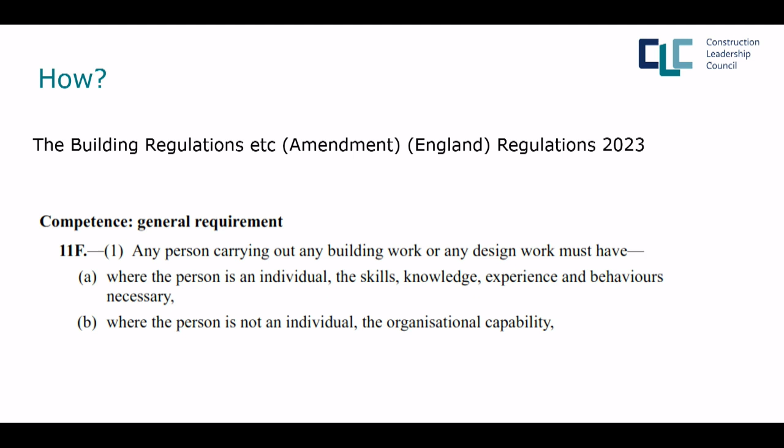The building safety regulator has said that is our regulatory body for competence, and competence is now enshrined in law. So if you say, why are we doing this? We have to do it, it's a legal requirement. And it says that competence for an individual is having skills, knowledge, experience, and behaviours - I'm going to say SKEB over and over again. Skills, knowledge, experience, and behaviours. This is what competence is defined as.

Why we're doing this is on a higher risk building, all those working in or around a higher risk building will now be audited on their competence by the building safety regulator. This is a new thing, it's going to come in next year. The building safety regulator has also said that they're going to use our competence frameworks as the baseline for auditing competence, so the work we are doing will help improve competence in our industry across the board. And on all other projects, the building control body will be auditing competence.

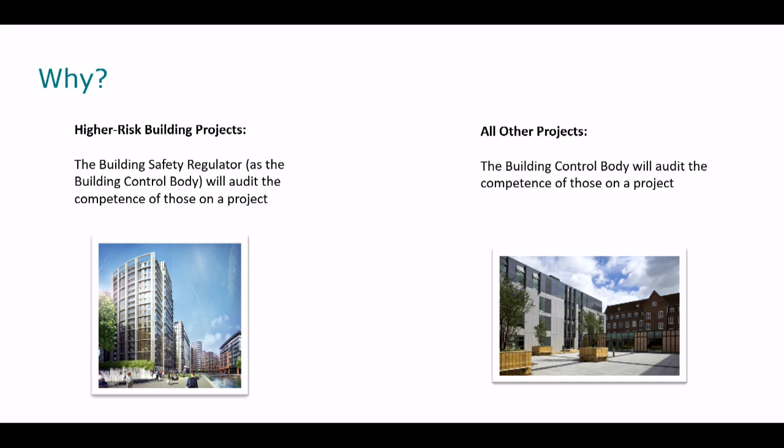I'm going to go through these slides quite quickly. I've got 15 minutes, but I'll give you the slide pack so you can just have it. If you have some questions, hopefully we'll have some time at the end, but I'll be quick.

So when we talk about competence, I like talking about competence equilibrium, because in those countries that have weak competence standards and enforcement, what we found is low innovation, underinvestment in training and quality, and really a price-led business. In those countries where we have strong competence and standard enforcement, they benefit from value-led businesses, better than normal innovation, and really consolidation of the employment standards.

For consultancy roles in the UK, we're okay, but for trades, it's pretty much all over the place. Have you seen the web of blame that was shown at the Grenfell final inquiry? It's pretty horrific, but I took inspiration from it and created an installer competence skills map, and it's chaos. When I joined, I'd never really worked in skills before, and this is what I saw - it was really confusing. I didn't know where to start, who to speak to. They all connected in different ways, and what I've tried to do is clear that confusion.

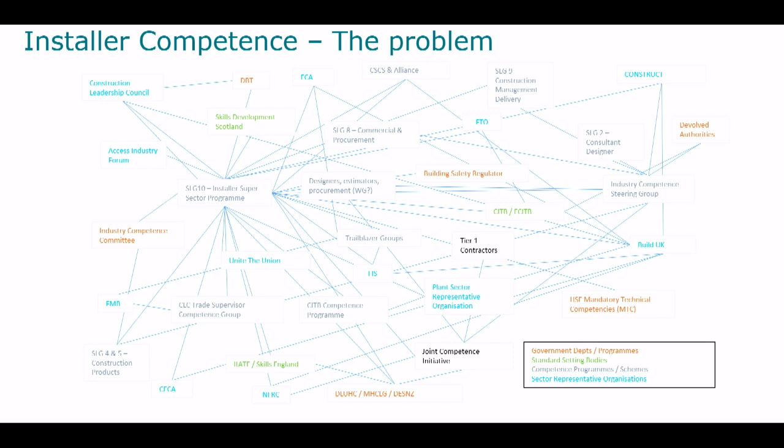So I've got a brick wall analogy. It's very basic, and I'm sorry, but it's how I work. The idea is that if this is the brick wall on the side of your house, today our brick wall on the side of our competence house is structurally unsound. And the reason why is we all focus on the solutions.

So if I said to you, what is competence for you? Some people might say it's my vocational qualification, my apprenticeship, my CSCS card, my whatever. But actually that's not what we're trying to do here, because people who sometimes set the standards for a vocational qualification may be completely different to the people who are setting the standards for an apprenticeship, and they're completely different to the people managing the card schemes.

And then you've got training providers running their own training, completely disconnected. What we're trying to do is dig down to that first layer of rotten brick and set the skills, knowledge, experience, and behaviours for the whole of our industry.

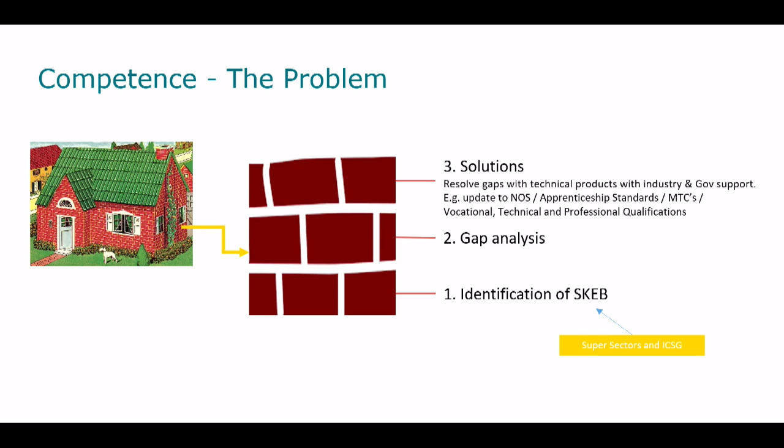And that will then feed through the skills system, so that no matter which route you take, whether it's an apprenticeship or a degree, you come out the other side with the same competence. Does that make sense? I hope so. Some of you are nodding, some of you are looking at me blankly.

But the Industry Competence Steering Group has just launched, and I wanted to show you this because not all of you are installers, some of you are engineers, some of you are program managers, project managers, and I wanted you to see this because there's about 1,000 people in the Industry Competence Steering Group today working on creating competence frameworks for all these roles. It's supported by the Building Safety Regulator.

So this work has been going on for about, it must be longer than that, about 5-6 years, but we're really ramping up now in installers. This is how it works today.

So we have the Building Safety Regulator set up. We have a committee that focuses on competence for our industry, and we sit under super sectors. Sector-led Group 10 is working on installer competence.

One of the other things we've done is try to align with all these competence programs. Like I said, fix that first layer of brick. So these are all the programs we work with, and the Construction Leadership Council supports this work.

So I'm going to show you very quickly our installer competence program so you can get a bit of an understanding of what we're trying to do.

We consider an installer competence framework to be made up of these documents: a strategy explaining why we're doing this, a skills, knowledge, experience, behaviour statement on a page - let's make it simple for these people, please - a route to competence, showing how we're entering industry and how we plan on gaining competence, and then an implementation plan on how we're going to implement that in the skills system.

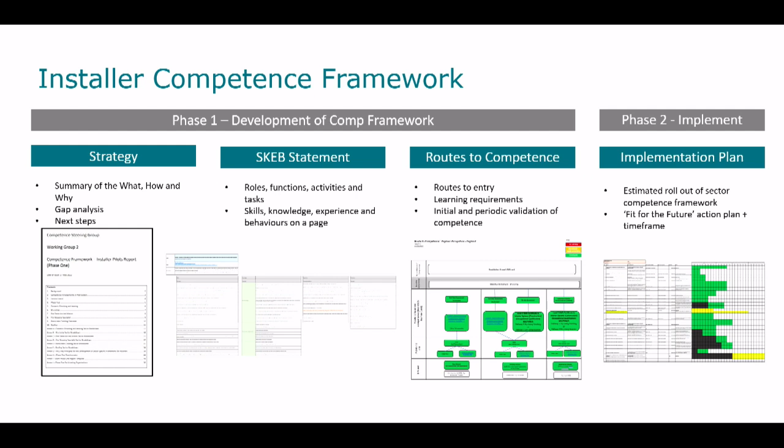This is our program here, and we've broken it down into 5 super sectors. As I said, there's 130 different sector groups, so about 600 people working on this at the moment. I'm going to run through it really quickly, but this is Envelope, and it's led by Neville Grunwald of Waits.

Everyone in green, we've created our competence framework, and we're working on implementing it at the moment. Everything in orange, we're working on creating those 4 documents. And everything in white, we are trying to set up and run. It can take a really long time to do just one, let alone 130.

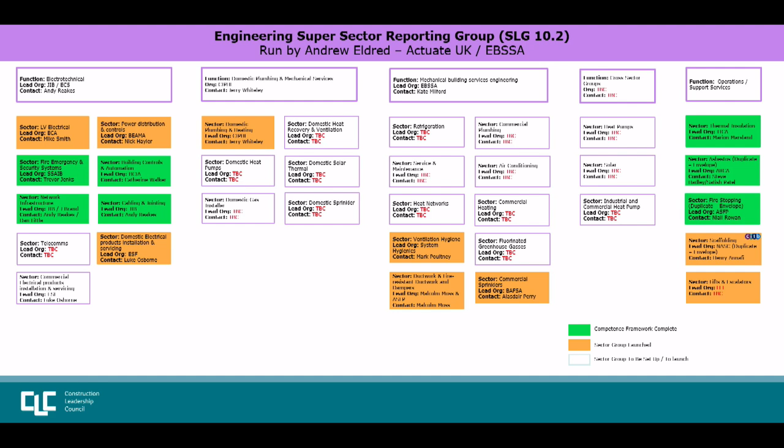Here's engineering services. We've got interiors. We've got civils, which is where tunnel skills sits, and it's again led by Alasdair Reisner of CECA. And then we've got construct, a lot of tie-in with the civils work as well, so there's a lot of kind of cross-pollination there.

So I'm going to give you an example, because I know I've just thrown a lot of information at you, but what we did on rain screen cladding. So rain screen is the stuff that burnt at Grenfell, right? And when I started on this, the rain screen standard was tied up in a roofing standard. So you had to be a roofer to install rain screen cladding. And it was factually incorrect. So the people who were trained to install rain screen cladding were trained in the wrong stuff.

It was so bad. So we got involved and we set out the gap analysis, which was saying where are the problems, like I've just told you. We set up a working group. We drafted what skills, knowledge, experience, behaviours look like for rain screen cladders. And now we are implementing it.

So we've updated the standards, we've unlocked funding, we're upskilling the whole industry, all the experienced workers at the moment, so that they can be competent in installing rain screen cladding. We've worked with CSCS on industry accreditation cards to tackle that issue, so that experienced workers can continue to work in industry today. We're also working with MHCLG on the cladding remediation program.

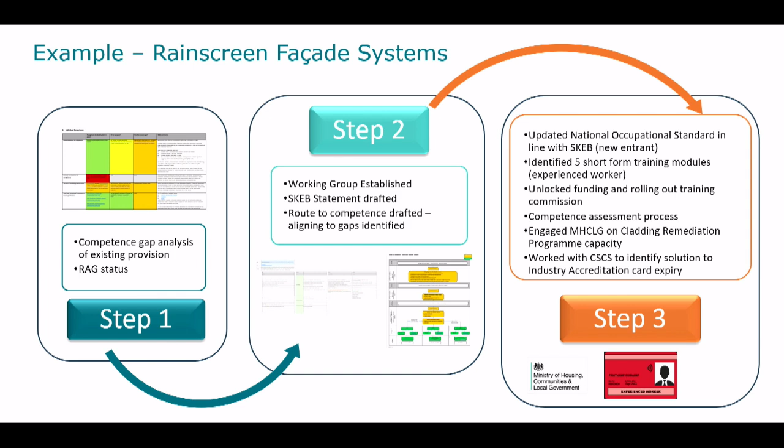So we're doing all of this just for rain screen cladding, but we plan on doing the same with all the sector groups. My last slide is about the CLC webpage.

All of this is on that page, but you can also have the presentation material, I think, Sam, is that right? Yeah. So that's all I wanted to talk to you about.

I would love for you to ask me anything you want. That's a lot of info, but go for it.

Any thoughts? Any questions? Just one for me then. So what's the key takeaway for people here? What do you want from the people attending here to support the scheme?

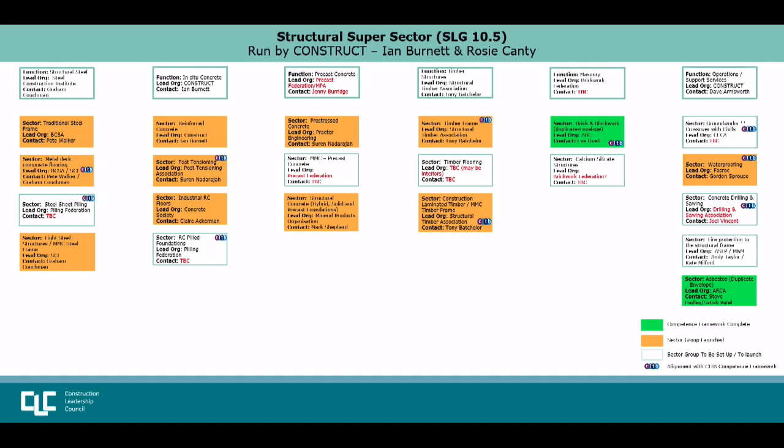We would love for you to get involved in the sector group with Tunnel Skills. We would love for some representation from all of you. It's a lot of work, as you can see, and we need your support in this. And we need some of these white boxes filled. So if you have contacts, people you want to get involved, or you yourself want to get involved, we desperately need you involved. So get involved.

And also talk about us when we're not in the room. You now know about this information. We'd love for you to talk about it, understand it, and yeah, get involved.

From a tunnel skills point of view, we're looking for help to do this, this is something that we're trying to do. So the tunnel skills group is the conduit then into this. If people want to get involved, or you've got someone in your organisation you think might be interested in doing this on the side of their day job, because we're all doing it on the side of our day job, we need more people to come along now. Because at the moment, it's just us. So that's part of the reason for this.

It's an appeal for assistance. Does that make sense? Does anybody want to get involved? Do you want to lift your hand now? I'd love it. No one's lifting their hand. Ian, but probably Ian would be a good point of contact. Most people know Ian, so. Yeah, we'd love for you to get involved.

I want to make a comment rather than... Oh, you don't want to get involved? Oh, okay, I was called, wasn't I?

Yeah, this is a huge project you've got, right? And the complexity is mind-boggling, and you're just thinking, of course, of high-rise buildings and fire cladding systems. Of course, that's a model then for something that ripples through the industry. Right, so it's huge.

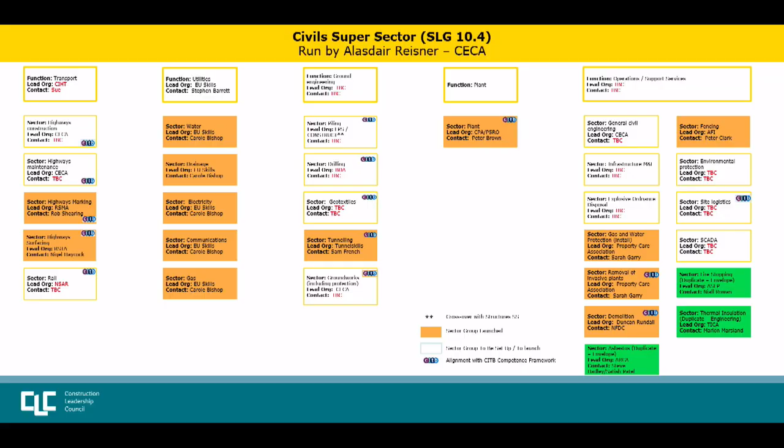That brings us on to our evening presentation, which is on the use of ground freezing for cross-passage construction on HS2. So we have three speakers.

Hammad, tunnel agent from STRABAG. She brings diverse experience from working within a specialised tunnelling consultancy to self-delivery and client positions, and has contributed to noteworthy projects including Crossrail. Experience in a wide range of tunnelling techniques ranging from sprayed concrete to tunnel boring machine assembly launch to traditional tunnelling by hand. She now serves as tunnel agent, leading the construction of 20 cross passages and 4 shaft to tunnel connections. Ala champions the promotion of best practice, co-authored a technical paper on innovative tunnel design and construction, and actively mentors peers to foster industry growth. Her contributions to the BTS and UN Women UK reflect her commitment to inclusivity and diversity in tunnelling. Recognised for her technical expertise, innovation and leadership, Ala continues to drive improvements in the tunnelling industry.

Following Ala will be Phil Allvey, Tunnel Engineering Manager for STRABAG UK. He's been in this position since 2020 and has held the position of Tunnel Engineering Manager for the HS2 2 project, overseeing 2 TBM tunnels and cross-passage construction. Prior to this role, he served as an engineering lead on the London Bank Station upgrade project, which involved the integration of SCL and squarework tunnels with operational underground tunnels. Phil achieved charter status through his design and geotechnical contributions to projects such as London Power Tunnels 2, Thames Tideway, and other significant UK-based initiatives.

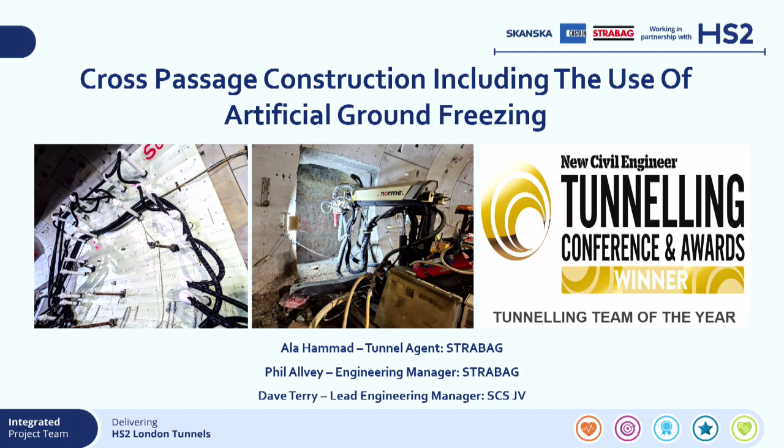Right, so I've really got the easy bit tonight. I'm going to hand over to Phil and Ella, but I'm going to talk about an introduction to the project, and the start of the evolution of the cross passages and the corresponding risk management. This includes the initial evaluation of the ground conditions and how these were incorporated into the ECI phase, or as HS2 calls it, the stage 1 phase of the works. I'm also going to talk very briefly about the structure of the team.

HS2 Area South works: all the London tunnels have been undertaken by the JV of Skanska, Costain and STRABAG. We're supported by our design house, which is a JV of Arup, TYPSA and STRABAG. For the cross-passage works, we've also engaged RDMI for the ground freezing and WJ for groundwater. I'll apologise in advance, there are numerous suppliers who we could have named, but I've only got another 35 minutes, so if I haven't mentioned you, apologies. Our works comprise everything from the southern end of the Colne Valley Viaduct through to the station approach at Euston. We passed through Old Oak Common Station, contract S4, which has been delivered by Balfour Beatty VINCI.

40 kilometres of twin-bore tunnels, an upline and a downline tunnel, approximately 1 kilometre of large diameter SCL, 7 ventilation intervention shafts, a diaphragm wall crossover box, various embankments, bridges, etc. However, the bit we want to focus on is Northolt Tunnels West.

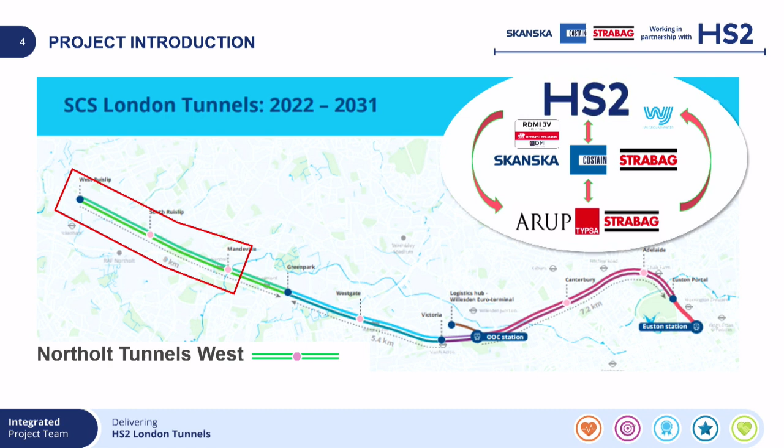Very, very simply put, the cross passage is constructed using a sprayed concrete primary lining, sheet waterproof membrane, and a cast in situ secondary lining. I'm not going to say any more about delivery of the works because I don't want to steal Ala's thunder.

So a bit about the geotechnical context. That shows a typical cross-section through the cross passage and a traditional borehole stick. You can see the orange there is...

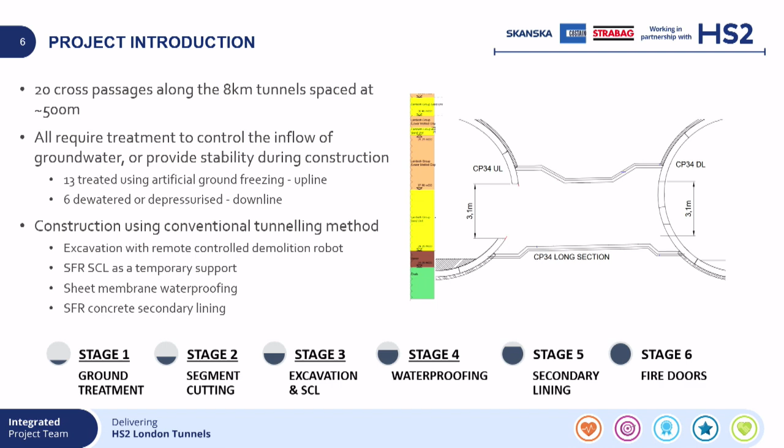So in terms of geotechnical hazards, the Thames group is fairly benign, the Lambeth group is notoriously variable, and the Seaford chalk brings abrasive conditions and high water pressures.

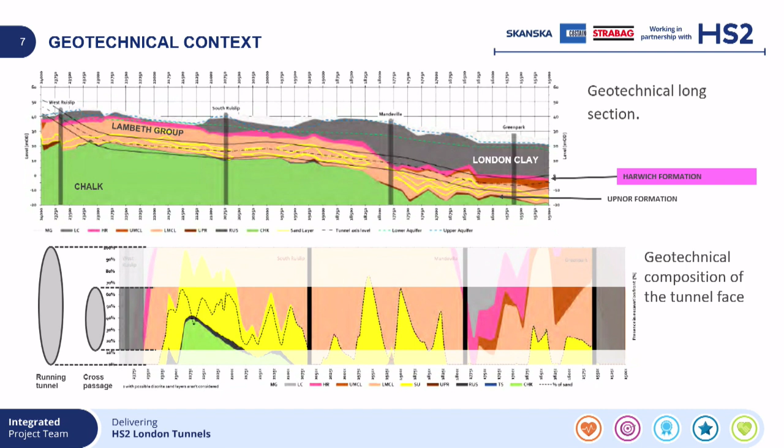So a bit about pre-contract planning, how all this started. This is like a trail of risk management, if you like. It started off at the pre-contract or stage 1 phase.

The principle behind stage 1 was to provide a cost for the scheme and also to develop our construction methods. So using our initial GI, we identified significant sand channels, we identified the presence of the Upnor formation, and we identified some of the hazards within the chalk.

So to communicate these conditions and to start establishing a budget for the works, we categorised the cross passages. So these range from...

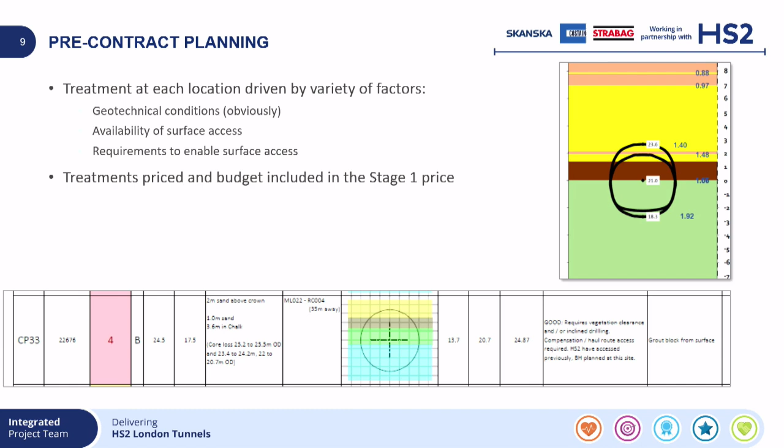Category 1, which was the cross passages fully in clay. Category 2, where it's in the Lambeth group but not influenced by the lower aquifer. Category 3, in the Lambeth group, influenced by the aquifer. And Category 4, which was actually within the lower aquifer.

What this enabled us to do was to start building up this picture, if you like, where we could start defining the treatments necessary and start putting a budget to them.

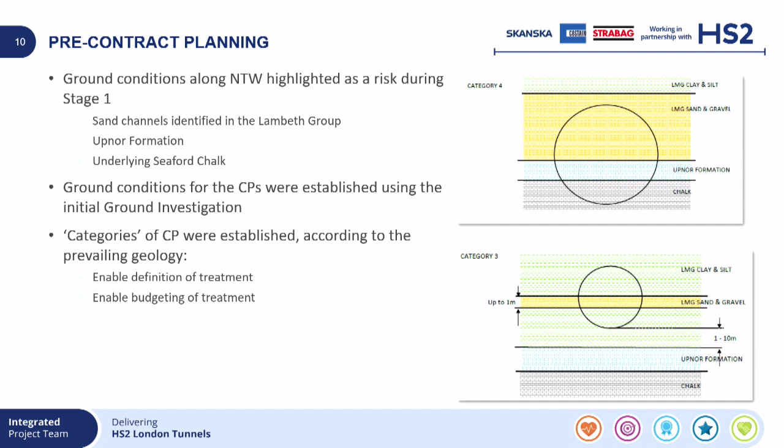Obviously the treatment assigned to the various cross passages were a function of the ground conditions, fairly obviously, but also the availability of the surface access and any work that needed doing to enable the access, bearing in mind that most of our alignment is under an operational railway corridor.

This information was scheduled out and then was included in our stage 1 price. So again, we're building up this picture of the cross passages to end up in a price.

Concurrently with this geotechnical risk assessment, we also had to position the cross passages along the route. The graphic at the bottom shows an extract from the High-Speed 2 technical standard spatial requirements, which governs the spacing of the cross passages in relation to ventilation shafts and each other.

This identified several gaps in the ground investigation where further site investigation was needed or would prove beneficial to ascertain the prevailing ground conditions at each location.

This was done in 2020. We used sonic borehole techniques to try and maximise the core recovery in the granular soils, and this supplemented the work we did in 2017 and the further site investigation we did in 2018/19.

Phil's going to talk a bit more about the verification of the ground conditions in situ, so I'm not going to say much more about this.

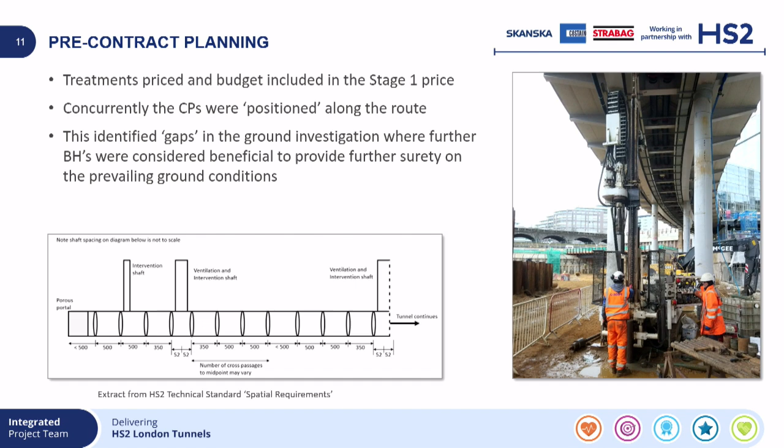I would like to say something about the team structure though. Fairly conventionally, NTW, as are the other engineering teams on the project, is set up with a delivery and an engineering team. We thought long and hard about how to best represent delivery versus engineering - that's the best we could come up with, so you can judge for yourselves who is who.

It's a fairly conventional approach, really. The engineering teams are a function of the overall SCS technical function, which is set up to be independent from delivery.

So we adapted this very slightly to increase the engineering ties with a QA team, as opposed to having a completely separate QA function and a completely separate technical assurance function. We tried to integrate this a bit to fulfill the role of the HS2 lead designer, the duties of which are listed on the slide.

The important one from the construction of the cross passages that we've taken forward into the actual delivery of the works is the one we've highlighted at the bottom, which is assuring that any changes due to ground conditions are incorporated into the design.

On that note, I will hand over to Phil, who's going to talk a lot more about the design and the engineering.

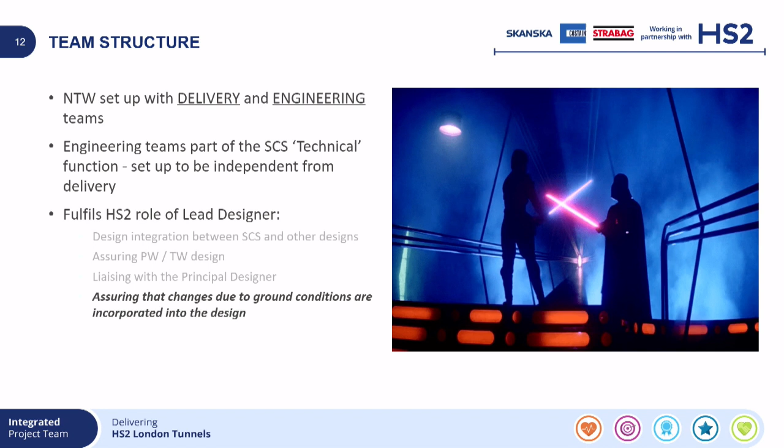Thank you, Dave. So yes, I'm going to go on to talk a bit more about the design and then a bit more about the engineering afterwards.

Starting off then, we knew we had a lot of sand, so we needed to look at the best methods to stabilise the soil. We really had three options here: permeation grouting, ground freezing, or jet grouting.

Jet grouting we could pretty much rule out straight away because we didn't have surface access - we're in central London. We then had the permeation grouting.

However, we're a bit concerned about the efficacy of this method because the soils consist of very fine silty sands, so the ability of the grout to actually penetrate through these soils could be limited. And actually on other projects, it was shown to have limited effectiveness in these sort of conditions.

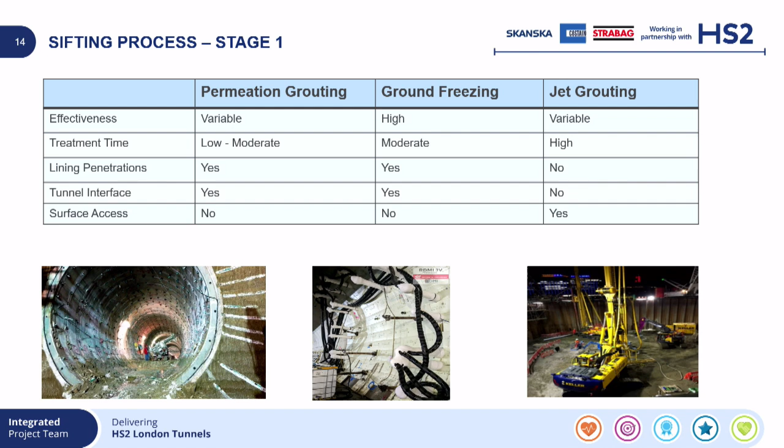So that meant that freezing was progressed as our chosen option. Freezing is typically seen as a last resort due to cost, however Ella will present later in the delivery slides why this was comparable to the other methods.

So the chosen method we had to work with the segments around the cross passage. We had the innovative special segments which we used, and this consists of tension rods both above and below the opening, embedded within the segment.

You can see how these perform under loading in some of the slides here. This replaces the traditional temporary works frame, so it's a very sleek solution, as can be seen in the right-hand picture - you wouldn't even know that it is there. So it saves a lot in terms of tunnel space.

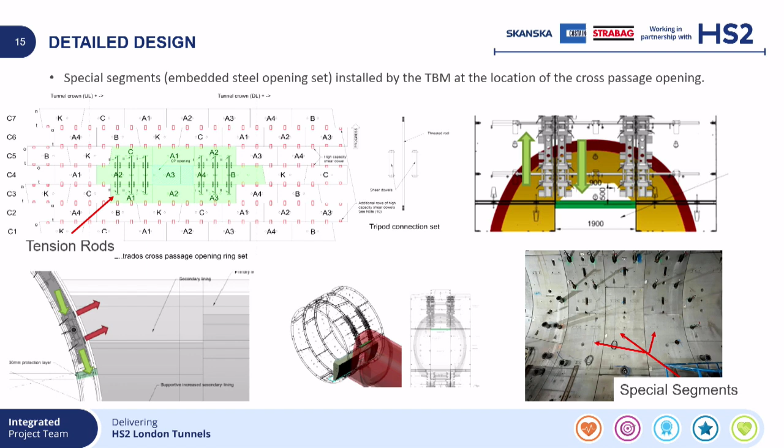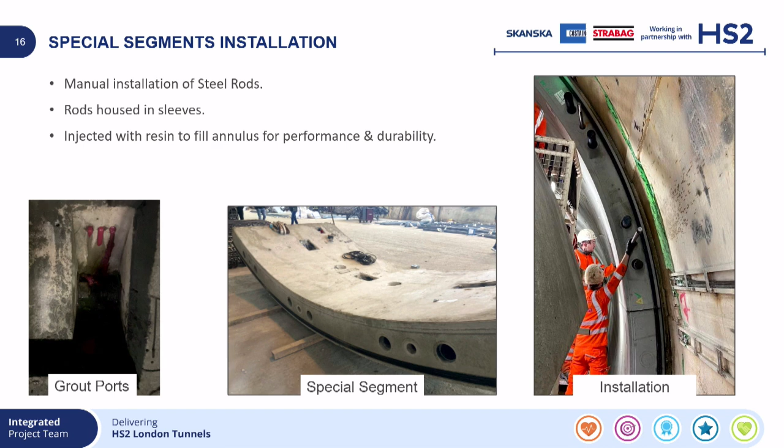So a bit more about the detailed design. As part of the detailed design, we needed to verify the properties of the frozen soil. This was done in the laboratory rather than undergo impractical and expensive in situ testing. Parameters such as the compressive strength and also the frost heave pressure were looked at, and they were fed back into the FE model to confirm that the ground freezing would actually work.

So the ethos of the design was that anything above axis level needed to be frozen, needed to be supported. And this was supported with a 2-meter thick freeze wall, which had an average temperature of -10 degrees.

The innovation also was to incorporate sacrificial drill zones into the special segments, which I've shown. Through this, we could insert the 30 freeze pipes or so that were needed to form this ice body. These were typically installed at 1 to 2 meter spacings, and they could extend up to 18 meters in length. The brine is then circulated through these freeze pipes at approximately -32 degrees, and this is a closed system, so there's no impact to the soils directly.

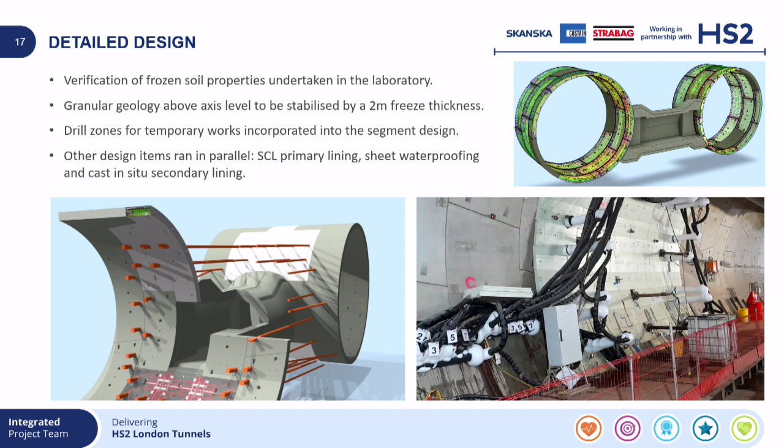Okay, so I now want to go on to talk a little bit about the engineering and how we involve the other teams as well. This involves design management, data review, and I then want to go on to talk about the rest - really 3 aspects of the engineering team.

So the first one then is design management. Freeze pipe design must consider the TBM ring roll, which can move plus or minus 100 mil, and also the horizontal and vertical deviation of the tunnels, which can move by 150 mil. So they will never be in their design position.

We also need to remodel the center line of the cross passage because of this horizontal or vertical deviation. This needs to be updated and put into the Amberg model, which is used as part of the SCL profile control.

Additionally to this, there are thermal calculations that are performed for every specific cross passage because each cross passage, as you've seen, has unique soil properties. So this will change the freeze time. Following this, we also need a Cat 3 check to confirm that the freeze pipe layout will successfully result in a closed freeze ring.

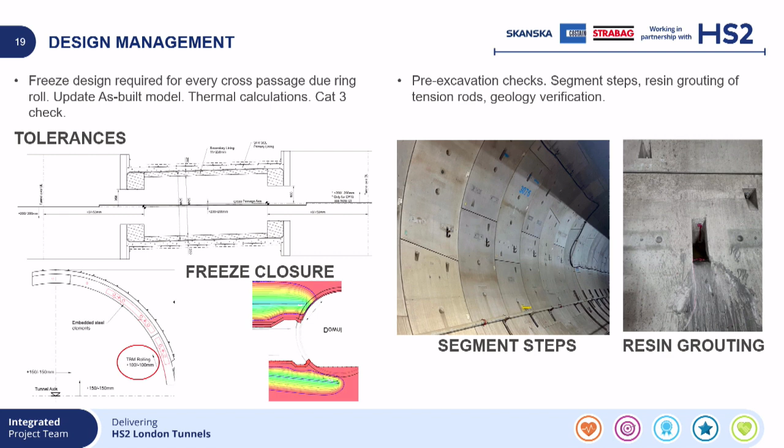And then also a key stage is the geological verification. So I want to spend a little bit of time on this because this is quite important for the process. As the TBM passes the cross passage, which you can see in the diagram in the top there, you can see that one of the TBMs has already gone past, with the other TBM about to go past as well. As soon as the TBM goes past, we'll take a spoil sample from the belt, and then we'll do a PSD test from this to confirm the granularity.

If the granularity differs significantly from the design, we'll then accelerate the probing process with our subcontractors. By probing, I mean we'll do hand probing through the grout sockets using a preventer in a typical probing array that you can see there. This is really to confirm the stratigraphy.

So in some cases, we actually found that there was more sand and it varied from the design model. We had to switch from dewatering to ground freezing. By doing this early, there was no program impact, because you have to remember that it can take some 40 days or so to actually form the ice body. So this was key to prevent any program delays.

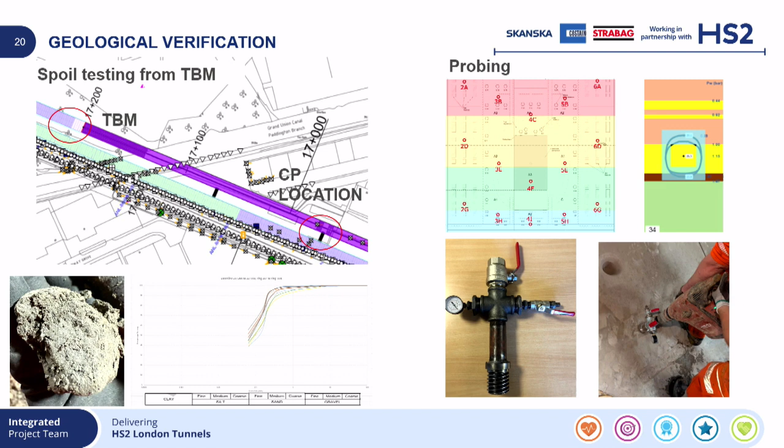Okay, and then I want to look at the second item that the engineering team and the other subcontractors look at, and that is the data review. Starting it off with the verification of the soil temperature around the cross passage. So there's 3 to 4 temperature pipes around the cross passage, and each of these temperature pipes has sensors every 0.5 to 1 meter along it.

The target average temperature is minus 10 degrees. There are also temperature sensors installed in the lining, on both the upline and downline tunnel, and this has to reach a minimum target temperature of minus 2 degrees. Additionally, a drainage pipe with a gauge is installed in the middle of the cross passage, which is critical to identify freeze body closing, because as the pressure builds up, it identifies that the ice is forming around the cross passage, and this pressure can then be released by opening a valve. This is critical to confirm full closure, so we can open up the cross passage to begin excavation works.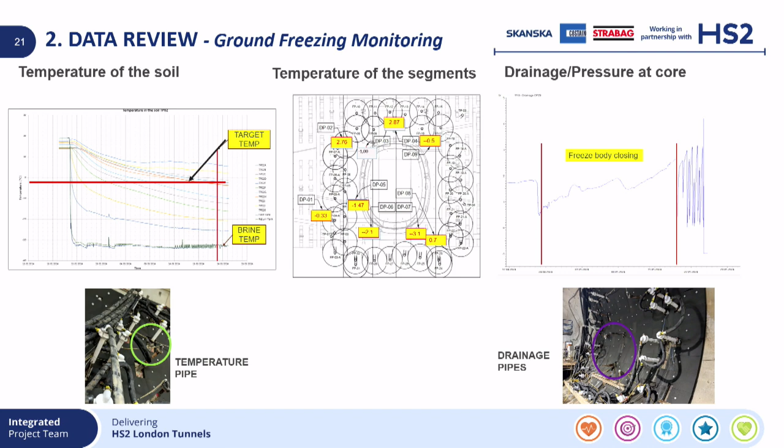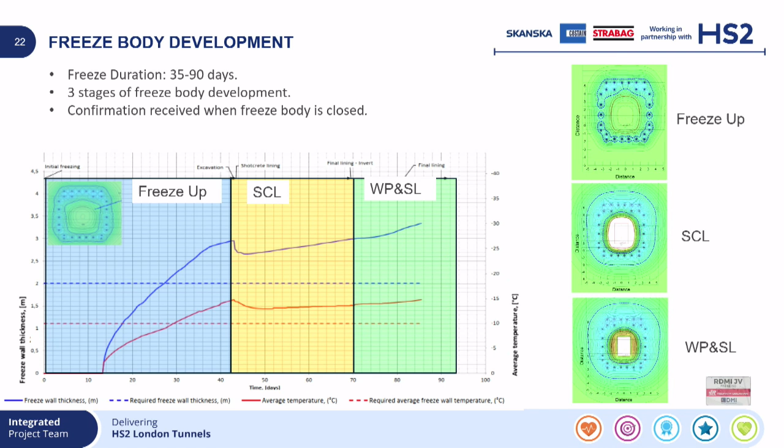Another key aspect of the data we review is the monitoring data. Before we start any works, we need both surface and in-tunnel monitoring within the cross passage. For in-tunnel monitoring, we have 5 arrays installed on the heavy and special segments, and as the ice body expands, we have convergence moving towards the inside of the tunnel. An FE model here shows one of the deflection profiles.

From the graph below, you can see that as the ice forms, the convergence moves, with the 2 chords adjacent to the cross passage opening showing the most movement. Different geologies will produce different frost heave expansions. For example, with more cohesive soils, we typically get more convergence.

Then as we begin excavation and SCL works, you can see that this heats up the ice body and the convergence rapidly drops off, so the segments start to move back to their original position. One thing to note is that if we have too much excessive movement, we will hold what's called a management action team meeting, which happens when we have a trigger breach. If we had, for example, an amber or red trigger, we might take mitigation steps, such as cutting the segments early to release some of the stress.

Finally, when we switch off the freeze, as shown by the green dotted line, the convergence returns back to its normal level, and the ovalization of the tunnel starts to return to what it was originally. For surface monitoring, on the right-hand side, we have transects set up above the cross passages, and you can see again that as the ice body forms, we have heave on the surface. During cross-passage excavation, this heave stabilizes, and then finally, when the ground freezing is switched off, it starts to return back to its normal value.

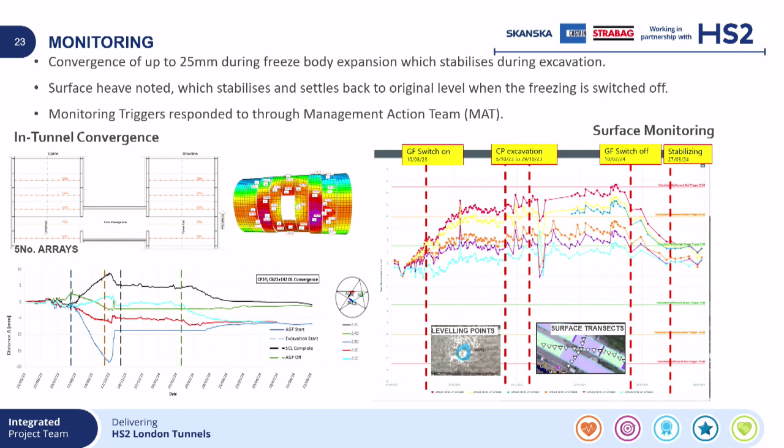Okay, so that's covered some of the data review that we look at. The third item as part of the engineering function is to consider the required excavation and support sheet, the RESS. The RESS ensures compliance with design and allows modification of the sequence to varying conditions, and it's signed by both the engineering and the delivery team. We have hold points in the RESS, which dictate critical items that must be followed before we move on to the next excavation stage. Rather than talk to you about what a RESS is, I want to show you a couple of examples of how we use the RESS to change sequence.

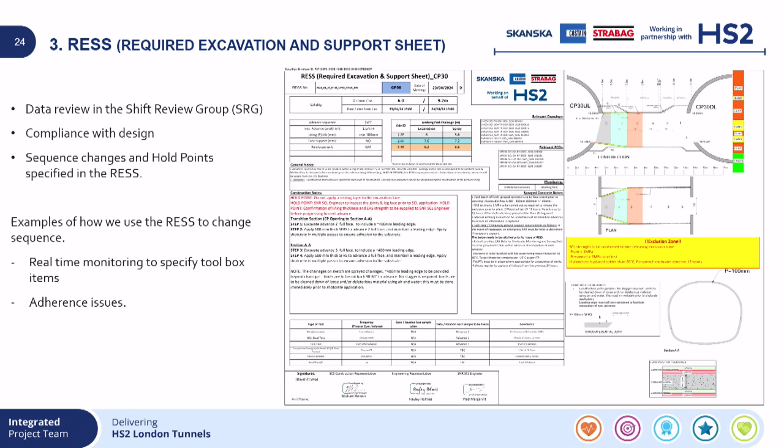The first example will be the use of real-time monitoring to adjust sequence, and the second will be when we have adherence issues or a geological challenge. On the first one, I want to show how we use monitoring to change the sequence. The design prescribed either an excavation split face or a temporary invert when we were at the collar sections or excavating near the tunnels, and this was to prevent excessive deformation.

So we wanted to change from this prescribed method to make this a toolbox item. So we needed to prove to the designer that deflections could be kept below predictions and below trigger levels. And to do this, we used the innovative Wisen system.

This is wireless tilt meters, which are installed on the cross passage in the arrays. So you have 5 arrays, like we've seen previously, and you have tilt meters installed in the middle of the segment. And you get the rotation around the joint, which as a vector by trigonometry is converted to a displacement movement.

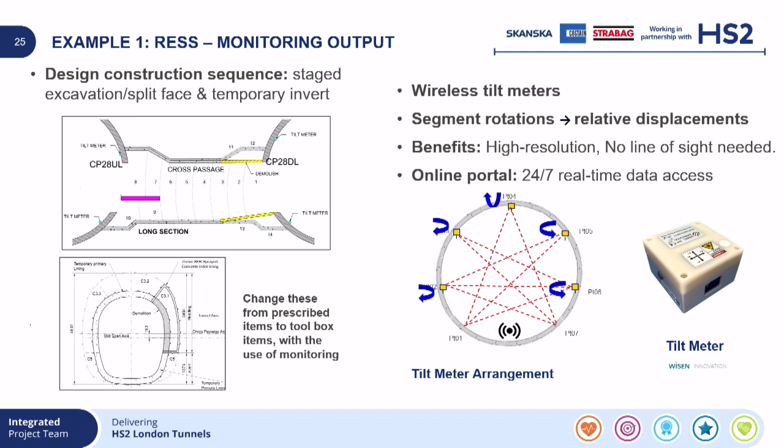The real advantage of this is that it's high resolution and there's no line of sight needed. So we could install this below the platforms, or if ventilation bagging was in the way, it wasn't an issue here. And it provides us with almost real-time data.

So the question is, how did we use this to define our excavation sequence? And we did this by defining a toolbox trigger. This was set to half the green triggers, with the green to red set on ovalization. Toolbox trigger was set at 16 millimeters.

This slide is just to show you how we react to a trigger breach and a non-trigger breach. So on the left-hand side, you can see that all the chords have remained below the 16 millimeter toolbox trigger, so we could continue as normal with the top heading and invert excavation. However, on the right-hand side, you can see that one of the chords has gone above the toolbox trigger.

So this would mean we would need to implement one of our toolbox items here to prevent further excessive convergence, such as the temporary invert, which would involve more breaking out, of course, or we might have to split the heading as well.

So the question is, how did we manage this as well? And it comes back to the RESS. We have a hold point in the RESS that states you cannot move on to the next excavation advance until you have checked and confirmed that the toolbox trigger has not been breached.

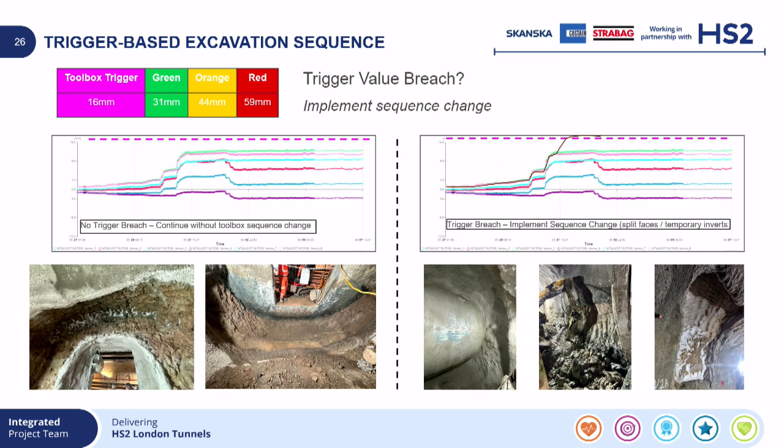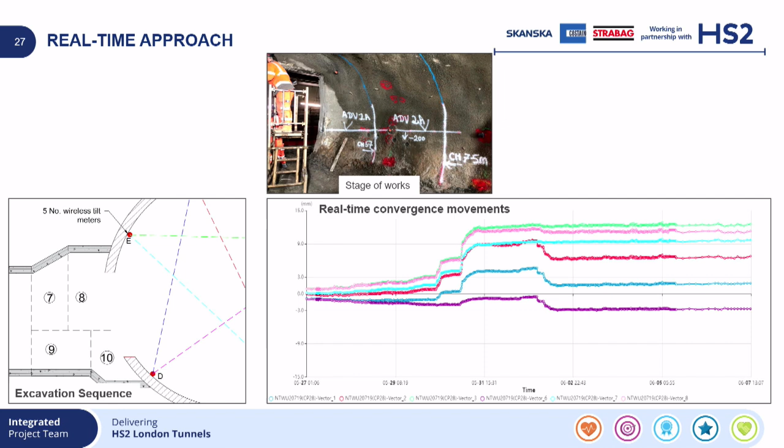The slides I'm going to show you indicate a real-time sequence of how we would react as the advances progress. So you'll see the picture in the top-hand corner there, and then the excavation sequence and the output of the Wisen system, which shows deformation against time in the bottom right there. This will be a better indication of how the deformation we get on each advance.

Okay, so let's start with advance 7 then, as we would do real time. The picture at the top there shows the advance, and then on the left it shows where we are in the sequence, and then we have the output of the Wisen system. You can see at this stage we have very low movements, only 3 mil corresponding to this advance. So this would mean we have not breached a hold point, and we can move on to the next advanced stage, which would be advance 8.

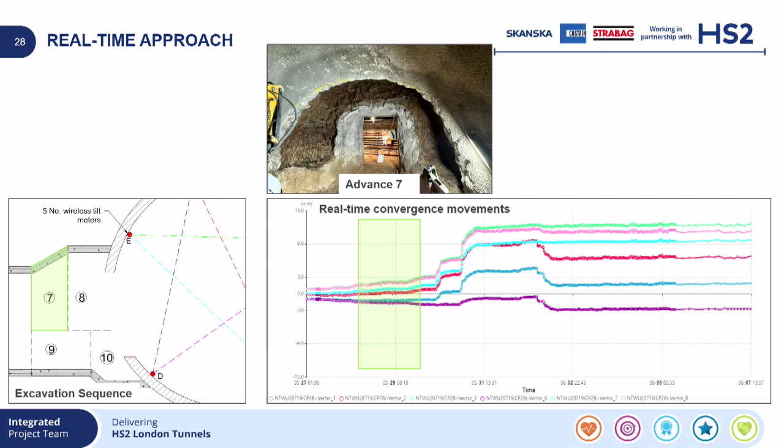So we continue with our live process here, and this is our excavation directly behind the tunnel segments, the top heading. This is where we correspond to the most movement, but again, we have not breached the toolbox trigger of 16 millimeters. So we can continue as normal without splitting the face.

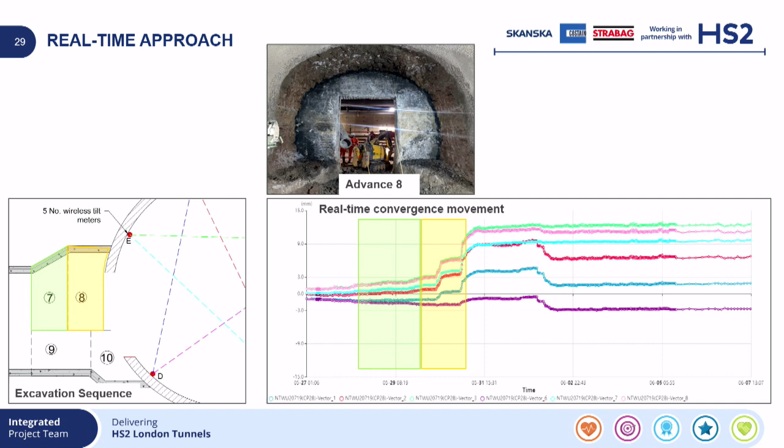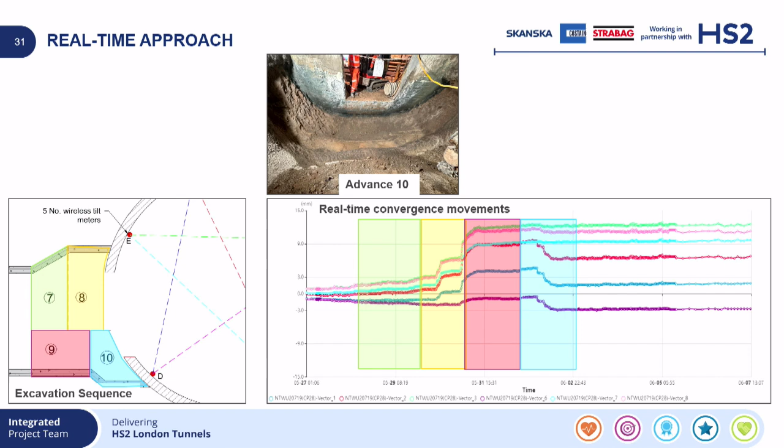And we would then carry on to our 2 inverts, which would be advance 9, and then finally advance 10, which is next to the tunnel segments. So we can see that during the 2 inverts, the deflection is relatively low. So once you have the top heading in, this acts to stabilize the segments. Hopefully this has shown you how we use the RESS and this automatic system to define our advanced sequences.

So the next example I want to show you is how we might change the RESS to ground conditions. This example is in the first cross passage where we had SCL adherence issues. This is different from fallout — it's not a fallout of the ground. It's simply the SCL bonding to the sand and not being able to stick to it, essentially.

So the mechanism for this was that the partially frozen sand was not strong enough to support the SCL, it would warm up, and that would mean the SCL would fall off as it was applied. So going forward, we needed to do two things to prevent this happening: reduce the initial mass of SCL being applied, and also reduce the exposure time of the sand to keep it stiffer and frozen for longer.

So we did this by implementing changes, one of which was using a P1 and P2 layer. That was to reduce the weight of SCL going onto the crown. So we'd initially apply a thinner layer of perhaps 50 mil, and then carry on with other works and top this up afterwards to full profile.

We could also do other things to prevent the exposure of the sand, such as a top heading and an invert, reducing the advance length, or doing a face subdivision. All of these items would prevent the sand warming up, and keep it stiffer, which would mean it would hold the SCL.

Other things that were done at the same time were using rapid acting accelerators and batching the SCL at higher temperatures.

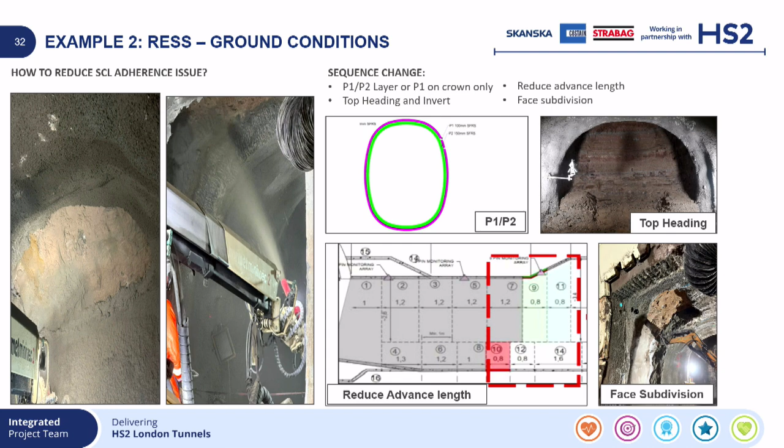Following this, we also wanted to make further optimizations. We were in a fully frozen cross passage, so we wanted to work with the designers here, and we've successfully changed the lining thickness from 250 mil to 100 mil. You can see the difference in thickness on the left-hand side. This had the obvious benefit that less mass was being applied to the crown, so you could hold the SCL better. It's also a massive saving in terms of SCL and a considerable carbon saving.

Once the SCL adherence issue was mitigated, we also wanted to look at other optimizations. Where we didn't have sand in the crown, we looked to increase the advance length, because we're in a fully frozen ice body.

Through the face logs and through the RESS, we could adjust the sequence. You see the full array of the cross-passage pictures there. But when we had clay in the crown, such as cross-passage 29, we could increase the advance lengths up to 2 meters, as was permissible by the design.

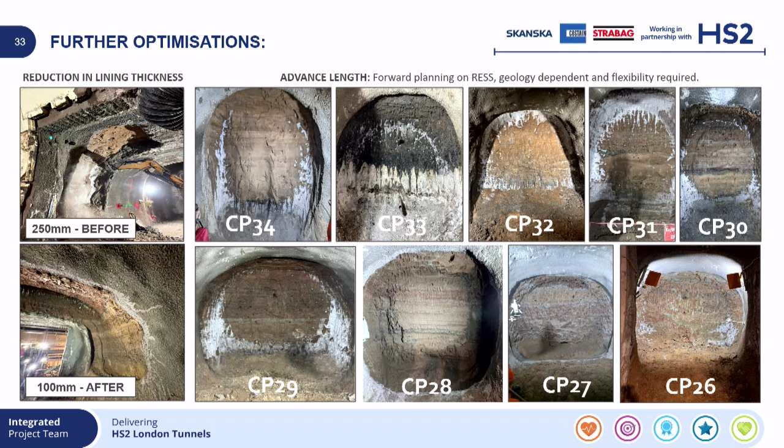This had the advantage of reducing cycle times, increasing productivity, and reducing the amount of SCL wastage as well. So hopefully that gives you an overview of the RESS and some of the engineering functions along with the other subcontractors. I'm now going to pass you over to Ella, who will talk us through the delivery and construction.

Thank you. I'm going to kickstart the delivery section with pre-construction. So the cross-passage life cycle begins when the ground treatment starts, followed by excavation and SCL works, waterproofing, secondary lining, permanent sealing works, cross-passage walkways and door frames.

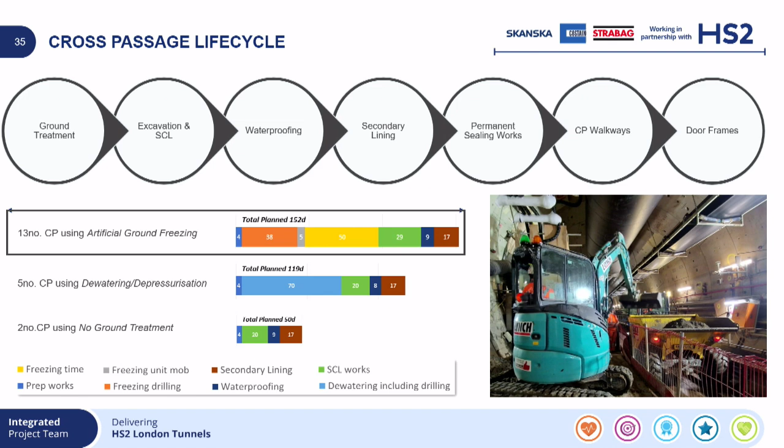The cross-passage life cycle duration varies depending on the ground treatment we choose. If we choose artificial ground freezing, the duration up until secondary lining completion is 152 days. If we choose dewatering depressurisation, that's reduced to 119 days. And if there's no ground treatment, that's 50 days.

In terms of risk management, the initial temporary works design concept for the groundwater mitigation incorporated a hybrid solution. This involved 2 subcontractors working alongside each other, and it risked delays in terms of both time and cost. For us, we need to try and mitigate this interface or completely eliminate it. So we looked at a couple of different processes, and I'm going to cover 2 for now.

The first being lean application. So we applied regression analysis, which is a study of the time activity relationship, and we looked at the hybrid solution first of all. The hybrid solution was a combination of artificial ground freezing in the crown and dewatering or depressurisation in the invert. This solution was going to be implemented on a number of 10 cross passages.

When we looked at the regression analysis in terms of reducing this, we looked at a fully frozen solution instead, eliminating the requirement of dewatering and depressurisation. You can see here that we've got the hybrid solution at 170 days. After we applied regression analysis, we were able to reduce that to a fully frozen solution of 152 days.

Of course, from a cost perspective, while the construction and design savings were straightforward to identify, it was essential for us to really consider the broader implication of implementing a fully frozen solution, considering the experience in the team. So we divided risk into two categories, the first being identified or time-related risk, and the second being unidentified or non-time related risk.

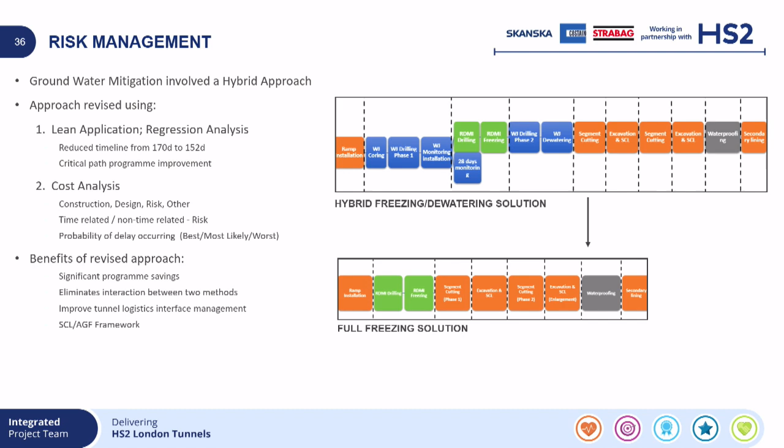So we developed a comprehensive framework which identified key risk areas and outlined mitigation strategies to address them. This structured approach ensured that all potential risks were systematically addressed and managed. We established 3 different stages for this comprehensive framework, the first being the peer review.

So the peer review looked at 26 global publications, including projects. We also got in touch with international project teams, including meetings, and we got in touch with industry experts. Overall, the conclusions from this peer review really offered us a solid understanding of the basics of SCL adhesion to frozen ground.

Some of the conclusions we came up with included the absence of adhesion measures on a lot of these projects in relation to mesh and other contingency measures. We also found that temperatures during SCL works could increase the temperature of the frozen ground and cause issues with adhesion, so an appropriate accelerator needed to be considered.

We also noted a lack of pre-production trials across all the projects we looked at. And finally, and most importantly, we established that there was no correlation between early age strength development on an SCL panel and on frozen ground.

This last point is probably the most important one, and for that reason we established a conservative approach. We adopted a correlation between early age strength development and shotcrete on frozen ground, and this basis was 10 MPa on a panel and 24 hours before we can allow personnel entry.

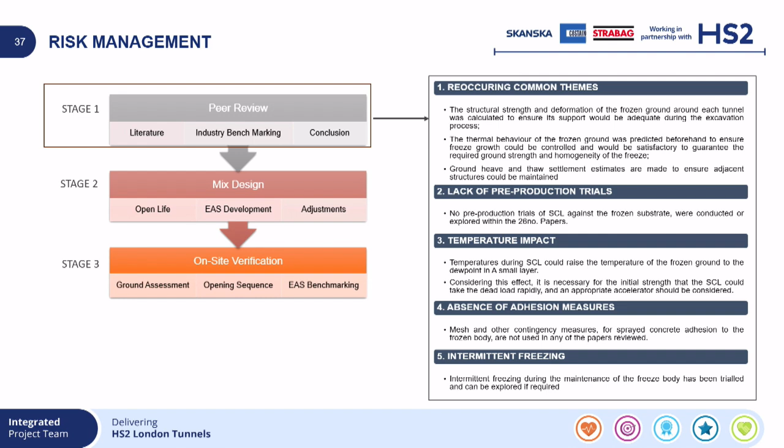These trucks travel up to 8 kilometres within the tunnel to the cross-passage face, where the concrete is discharged into a concrete pump, and then along a concrete line directly to the robot. We're using Normet pumps and Normet robots as well.

Recognising the logistical challenges from travelling that distance, it was clear to us that we needed to incorporate something to extend the open life of the concrete. For us, that included incorporating a hydration control admixture, which increased the open life to 6 hours, which is what we targeted. This ensured viability despite interface challenges, and any breakdown risks and traffic delays were mitigated.

In terms of the accelerator, we trialled 2: the Normet TamShot 80AF and the Normet TamShot 110AF. We tried different dosages at 6, 7 and 8%. We did choose 110 as well, based on other projects using it in similar ground conditions, including Silvertown Tunnel.

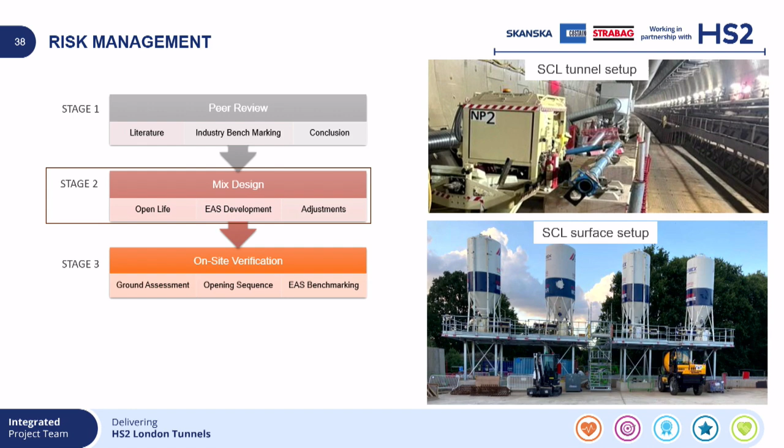So now I move on to the construction, and I'm going to focus particularly on the use of ground treatment with ground freezing. You'll see this timeline bar at the bottom of each slide indicating the different construction stages.

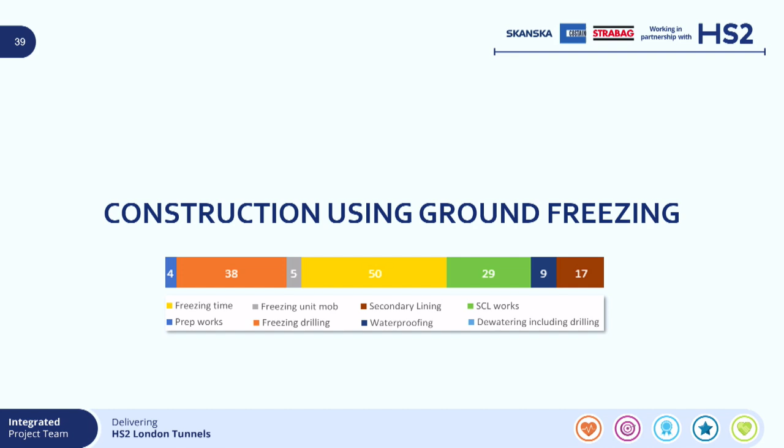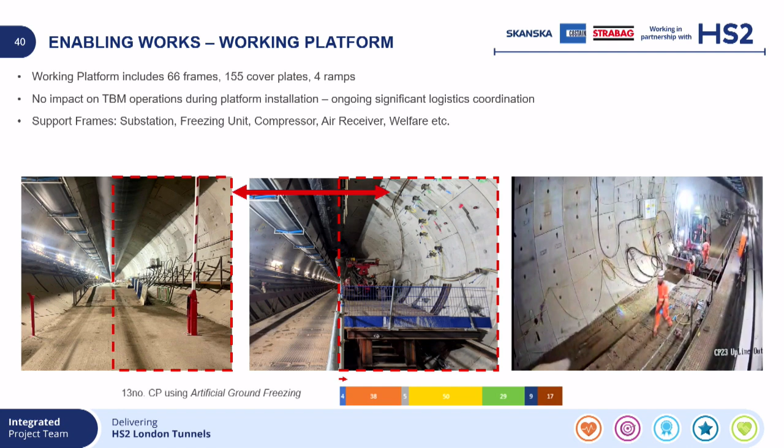Our enabling works start with the installation of working platforms. These working platforms are made up of steel modular units, and they need to be installed, dismantled and relocated with the TBM operations in mind. We need to try and avoid impact on TBM operations, and we've been able to do this quite successfully so far. These platforms are particularly important from an interface management perspective.

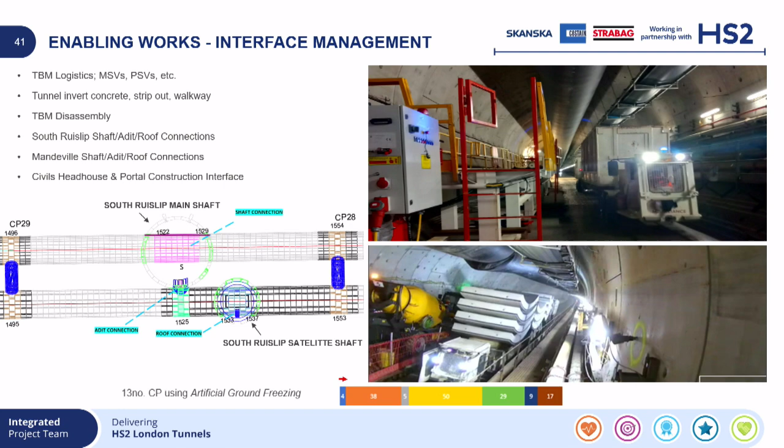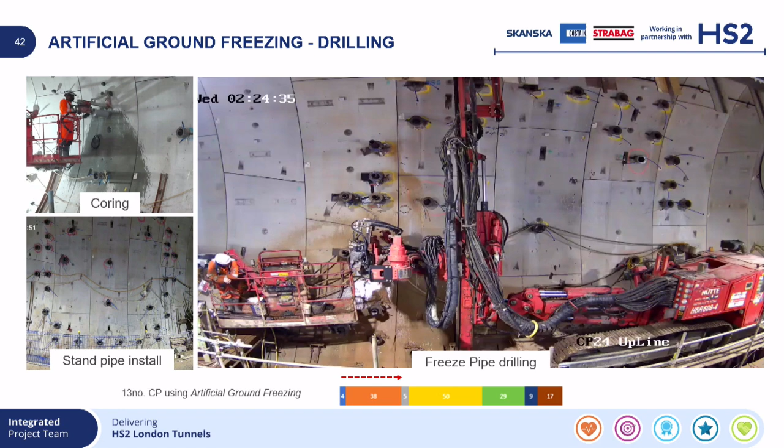Moving on to the drilling works, which is the first element. We start with coring the segmental lining, the installation of standpipes, which you can see on the bottom left-hand side, and then the drilling of the freeze pipes themselves. Phil already mentioned more about the drilling, so I won't go into too much detail, but you can see here now 38 days in orange. This activity typically takes up to that time, but we've usually been doing it a bit quicker than that.

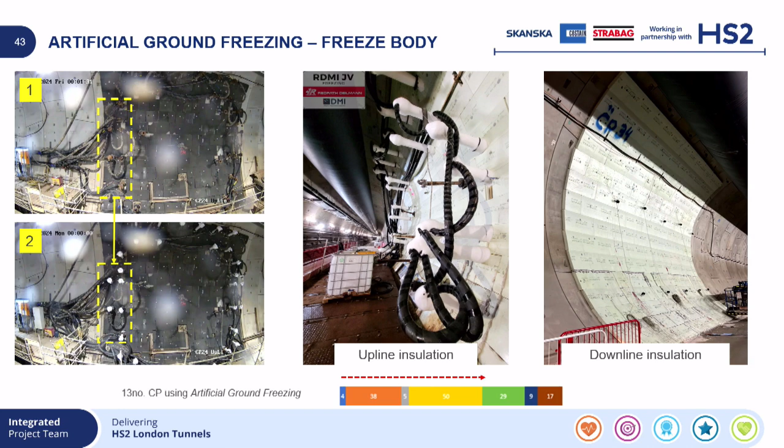In terms of the freeze body, Phil has mentioned some of this already, but for us it's particularly important to install insulation on both the upline and downline tunnels. Once the brine has gone through the closed circuit system and is being circulated, and the freezing unit is installed, within a certain amount of time there's now ice on the freeze pipes here, and you can see the ice development alongside. I've added 5 days, which is usually the freezing unit commissioning period, and 50 days, which is around the time it takes for the freeze body to develop. I'll discuss that a bit more later.

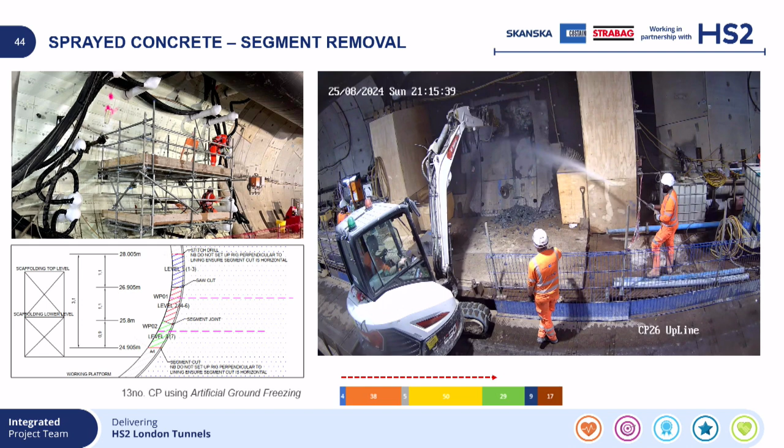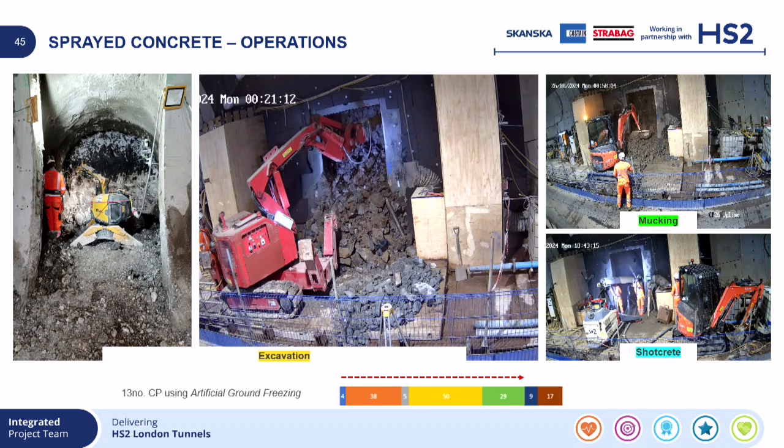Moving on to the segmental removal. Our segmental opening is 3.1 metres by 1.9 metres. The segments are systematically removed, enabling a gradual assessment of the ground, and if necessary, the application of SCL as well. The sequencing of the opening typically follows a conservative approach based on anticipated ground conditions. In terms of operations, if sand is anticipated above the tunnel axis, we typically start with a top heading and invert, otherwise we'll go with full face excavation. This approach minimises the exposure of the ground to the tunnel temperatures, and also allows for verification of the ground. We use 1 to 1.6 metre advance lengths, with extended lengths in the enlarged collar areas, and we use multiple passes of shotcrete to ensure proper adhesion. You can see the different phases above, and at this point we've allowed 29 days for the SCL works, including the segmental removal.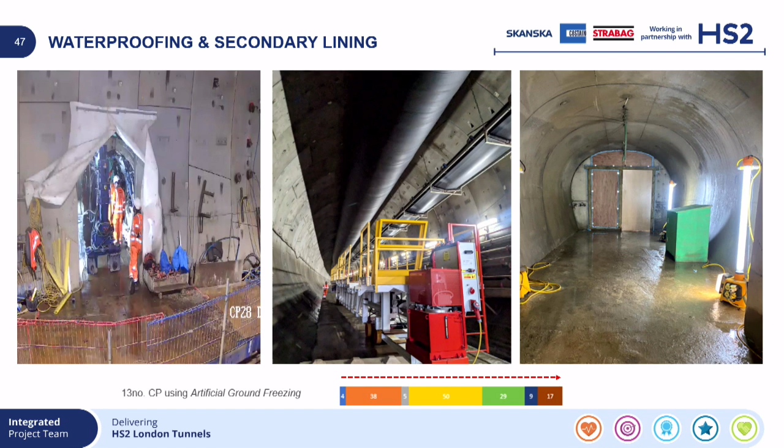In the middle we have our turntable. This allows us to remove the working platforms so we can install this instead, and maneuver the current shutters on top of it. It means we can get a head start on the next cross passage with a working platform. You can also see on the far right-hand side a completed cross passage with the secondary lining works and temporary fire doors. And you'll notice now we've come to the point of the 152-day duration for the secondary lining works.

I'll move on to lessons learned. Remember earlier I mentioned the 3 stages of the comprehensive framework we developed. I mentioned the 24 hours and 10 MPa on a panel, this conservative approach we adopted. This approach did impact our production, so we needed to find a way to reduce this and develop the correlation ourselves.

So what we did was, if geology and ground conditions allowed, we opted for a double heading and invert, as you can see here. By the time we finished our second top heading and came back to do the invert, we wouldn't have waited a full 24 hours. The impact would be a bit less, although we did wait the 24 hours.

So we concluded that we needed to carry out simultaneous in situ testing. We tested freshly sprayed concrete in the invert at 3 different locations - left, centre and right. We plotted this on the graph you can see bottom right. The testing included penetrometer readings up to 1 hour and stud testing at 2, 3, 6, 10 and 12 hours.

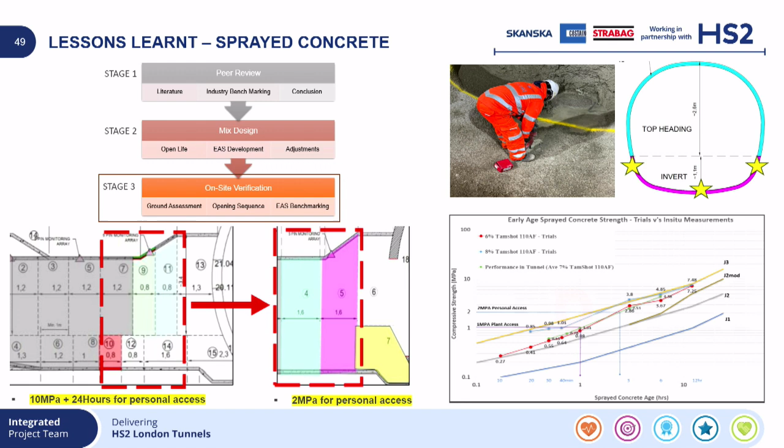In terms of other lessons learned for the sprayed concrete works, one of the first things is adhesion. I mentioned we trialled both TamShot 80 AF and 110 AF. After advance 3 or 4 we stopped the 80 AF and switched to 110. We found 80 did not perform well on frozen ground, whereas 110 was high performing, and that worked really well for us.

With the last advance, we reduced the accelerator percentage locally to avoid or reduce rebound entrapment when exposing the tunnel rings on the other side. We observed that heat generated from the SCL would cause adhesion issues, which we had already noted and thought about from the peer review itself.

So we did a couple of things to mitigate this. Where there was time between removing the insulation from the segments and opening up, if this time was too long, we would install extra drainage holes in the segmental lining, allowing us to eliminate excess water before opening. This is a lesson learned because we previously had an issue where we left it too long and there was quite a lot of sludgy material behind, which we incorporated going forward.

As per most SCL works, in the first few advances this face was sealed as typically we do, but due to stability and heat generation, we removed this requirement, so we were not sealing the face on any of the frozen cross passages. Shotcrete application was carried out in multiple passes to ensure proper adhesion. Finally, in unfavourable ground conditions, we restricted the SCL work to 50 mil in the crown and shoulders initially, topping up slowly to reach full thickness as work continued - that really helped with adhesion.

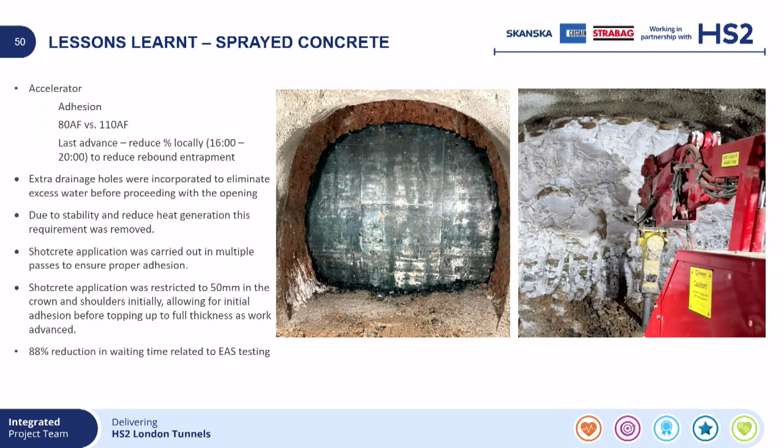In terms of the lessons learned for the ground freezing, Phil would have already mentioned that in the beginning, we have unique designs for each cross passage. Initially, this design was driven by geology only, and we had a fixed number of freeze pipes, temperature pipes, and water depressurisation pipes.

What this meant is that the freeze time would really vary depending on geology, so you can see here between 40 and 90 days freeze time. From a production point of view, this didn't really work for us, and it made it quite difficult to plan our works and think about the interface management that I'd mentioned earlier.

So we looked at a revised approach where the design was driven by the geology and also the reduced freezing time. What we wanted to do was reduce that range, so it wasn't between 40 and over 90 days. We wanted to reduce this to between 40 and 50 days, and we installed extra pipes to target that duration. You can see here all of these targets are below 50, which is great, and the extra freeze pipes weren't a significant amount.

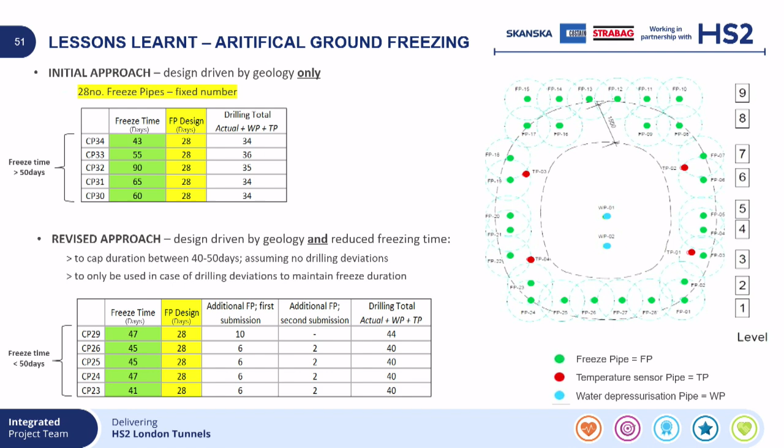The amount of time to drill extra freeze pipes versus the amount of waiting time made sense to be able to do it this way, so that was a good saving for us.

If I move on to the next one, you'll be able to see here with cross passage 31, which is a few cross passages later. This is much, much better, and you'll see that the actual is much more to the left than the planned. You'll also notice that this one was planned for 33 days and we completed in 17, versus the previous one where we'd completed it 4 days ahead.

The main difference with this one is that we didn't have to wait 24 hours for the frozen ground, so that was a big win for us. And we had some small pump issues in the beginning.

Now, we noticed obviously from this the benefit of having that correlation, that data available to us in terms of program savings and delivery. And given the limited application of artificial ground freezing in the UK, for us it made sense to use the opportunity, the unique opportunity of doing 13 frozen cross passages to continue doing the testing, although we don't necessarily need it anymore, considering we have the correlation.

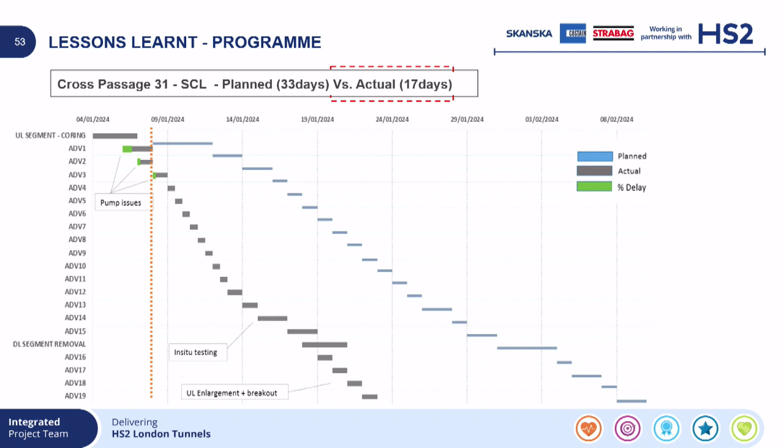So what's next? So far with the cross passages, from CP34 working our way all the way along to CP15 at Green Park, all 20 cross passages, we've completed 11 freezing cross passages, 2 dewatered, 11 SCL as of last night, and 10 secondary lining. So it's really good progress within the team.

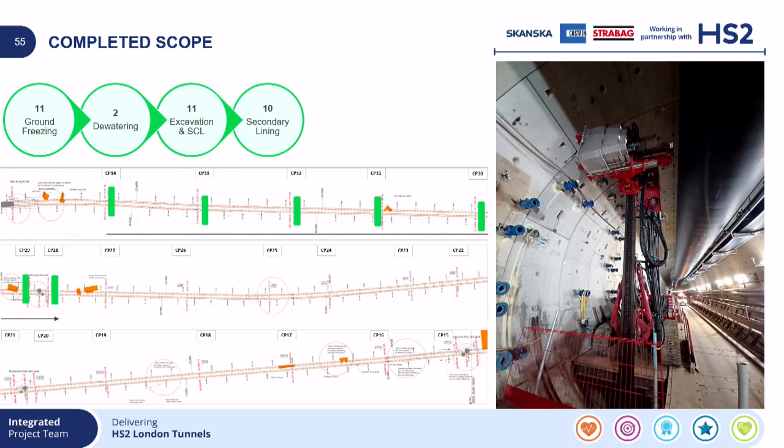However, there's a lot of scope still left to do. We've got another 2 frozen cross passages to do, 3 dewatered, 9 SCL. We're only halfway through the secondary lining, so another 10. We've got 13 sealing works to do, walkways, door frames, and then a number of tunnel to shaft connections, including adit works, shown in blue, where we still need to carry out some work.

I thought the 3D image on the right would be useful to show, to really give you an idea of the proximity of the works. You'll see there we've got cross passage 28, we've got a roof connection that we need to do, and an adit connection that we need to do, all within a 60-metre area. And of course, this is where things like the working platform and interface management come into use.

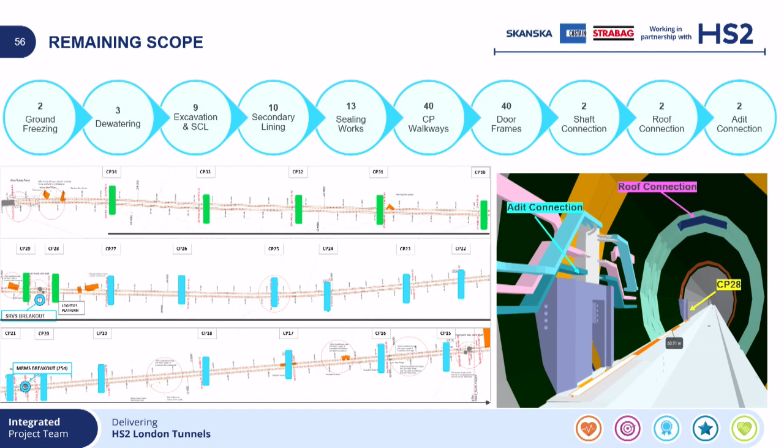So the ongoing construction of the cross passages, as demonstrated through these slides from Phil and Dave, has proven very successful to date. There's been a clear willingness amongst the cross passage team and all the supporting functions to embrace the concept of lessons learned and really optimise the construction sequence. This has been evident through a transparent and open culture, especially with the dynamic sequence changing we've been doing.

Now, particularly for the frozen cross passages, this commitment has been demonstrated through various actions. For example, going from the openness to go from a hybrid solution to a fully frozen solution, the interface management I've discussed where we have to coordinate with the whole tunnelling team, and the production of the innovative data I've went through as well.

Especially where we're still producing data that isn't necessarily benefiting us right now, but we're doing it to benefit the industry as a whole by the end of the job.

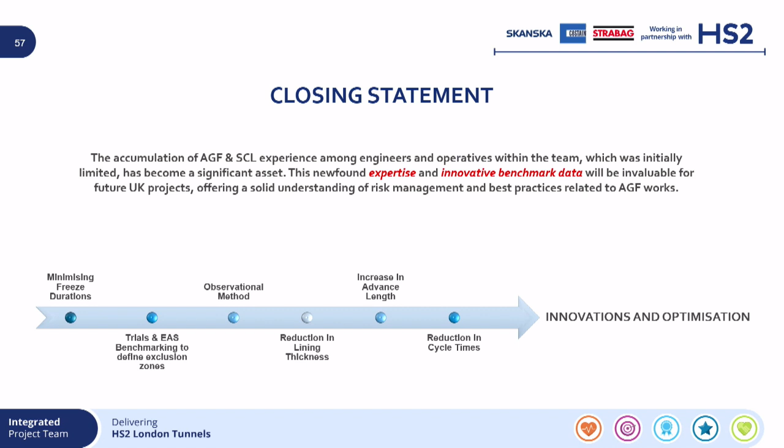So I'd like to close with the statement that's up on the screen, which is the accumulation of ground freezing and SCL experience amongst the engineers and the operatives within the team was a very limited asset to begin with and we really struggled with, but now has become a significant asset to us. This newfound expertise and innovative benchmark data will be invaluable for future UK projects, especially for the workforce and engineers we've got now with all this knowledge. This really offers a solid understanding of risk management and best practices related to ground freezing. Thank you.